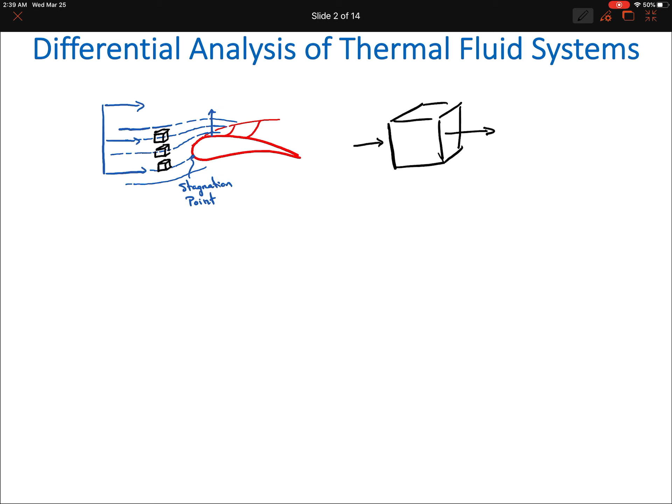And if we consider those boxes, make those boxes larger, well, we have a certain amount of fluid coming in and out, and we could then describe our changes in mass, our changes in momentum, and from that we could provide an estimate for what happens with the airplane wing. So this differential control volume is the key to this whole analytical process.

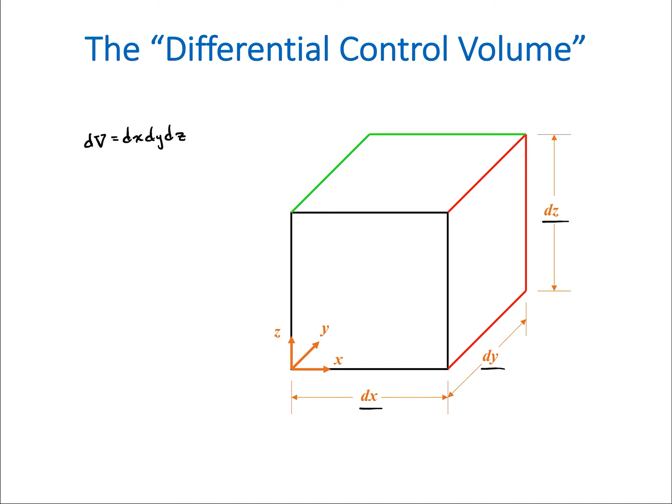And we define it by dx, dy, and dz. So our differential volume is defined as dx, dy, dz. We could also say that the amount of mass inside of this differential volume, our differential mass, would be equivalent to our density times our differential volume.

Now if our volume, if this dV is quite small, we might be able to say that rho is constant. We could say this if dV is very, very small, or if we have an incompressible fluid. This isn't a great way of saying that. Let's say 0.1, it's very small. Not that it's much, much less than 0.1, but just that it's very small.

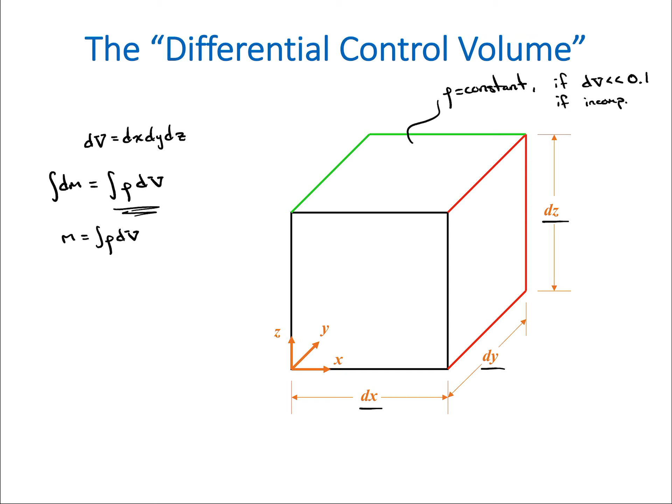So if we do the integral across this entire differential volume, we could then get a statement of the amount of mass that's inside of this system. And we can confirm that that is mass by quick inspection: density is kilograms per meter cubed times meter cubed. We have kilograms. As a result, we clearly have defined what the mass is inside of this volume.

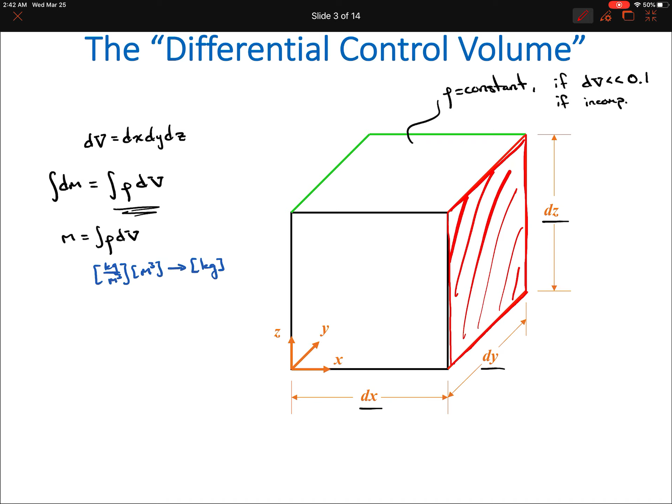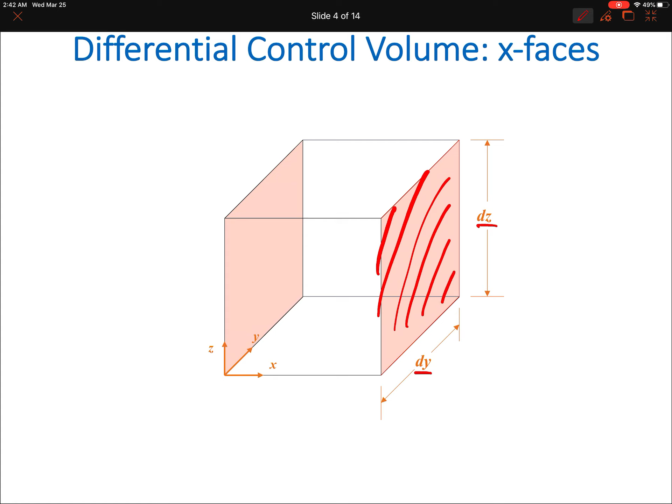Now the thing to pay attention to is the fact that there are all these different faces. There's a dx, there is an x face here on the right hand side, which is defined by dy and dz. So this is that face, dy and dz. It's the x face. We have an x face on the opposite side as well of this same cube.

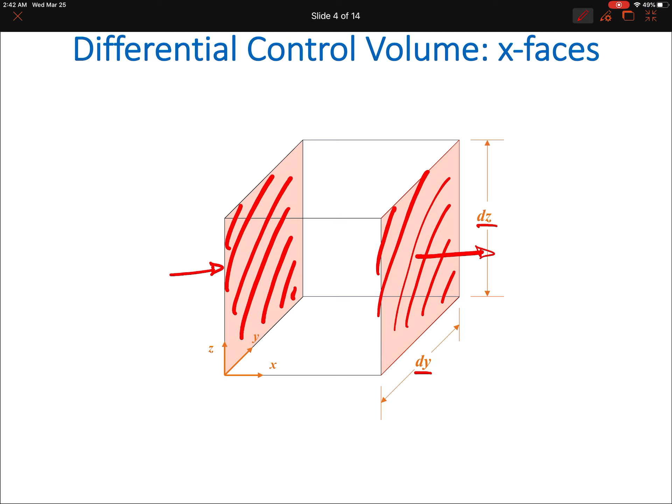This is going to become important because we have a certain amount of flow that comes into the system in the x direction, and a certain amount of flow that goes out in the x direction.

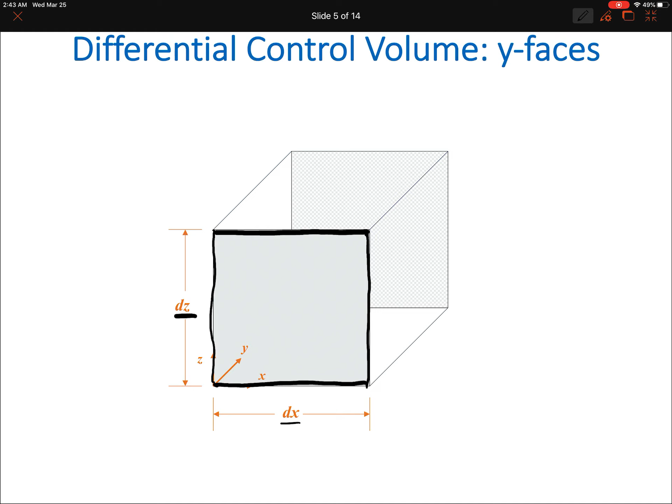The next one is our y face, a constant value for y. And the area of that square is then defined as dz dx. And then we have a similar thing on the opposite side, but further in the y direction.

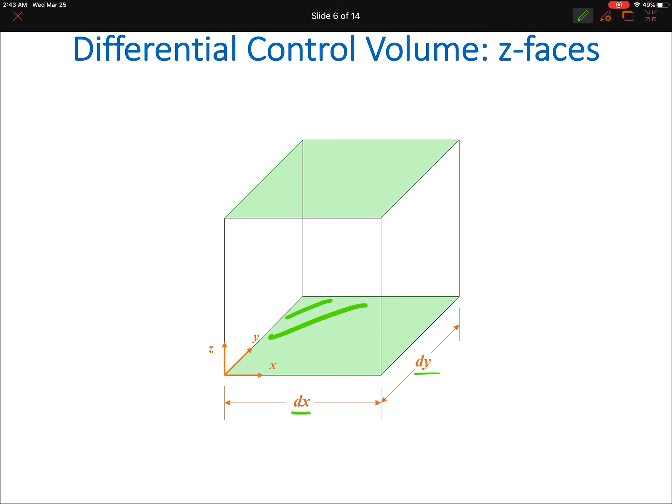And then last, we have our constant z faces, or planar, in the z direction. This is defined as dx dy in terms of the area. So the area of a z face is always defined as dx dy.

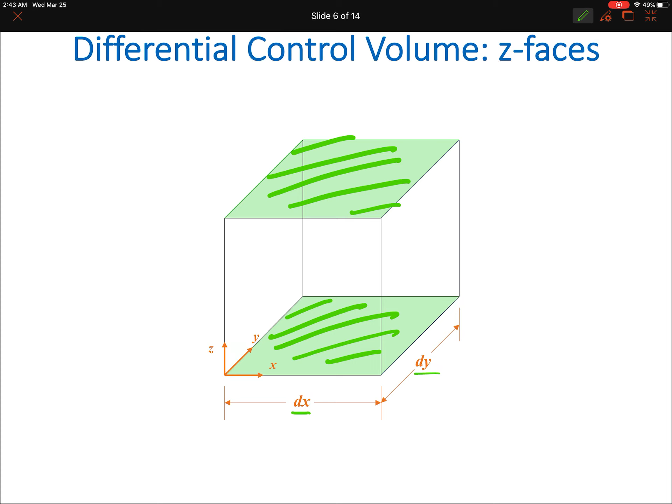Now, our conservation of mass, we've talked about this a number of times in previous classes, is defined as the rate of change of mass stored within the control volume, or mass accumulated within the control volume.

One easy analogy to think about this is say you had a tank that had a spout with water coming out of it, and you also had a faucet that was simultaneously filling the tank. There's a certain amount of water in here. So we have mass m dot in, and we have m dot out, or at the exit.

Well, if m dot in and out are equivalent to one another, then we're not storing anything inside of here, or we're not changing the amount that's being stored. However, if those are not equivalent to one another, then we might be accumulating more water inside of that tank. And that's what this equation is all about: storage. It's basically storage of mass and mass flow in and out of the system.

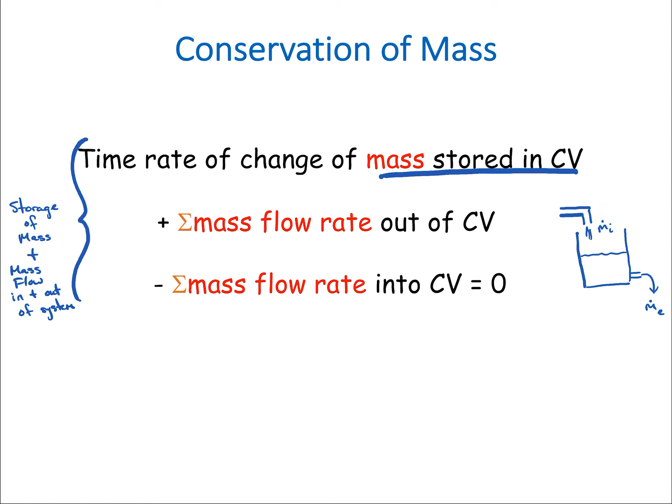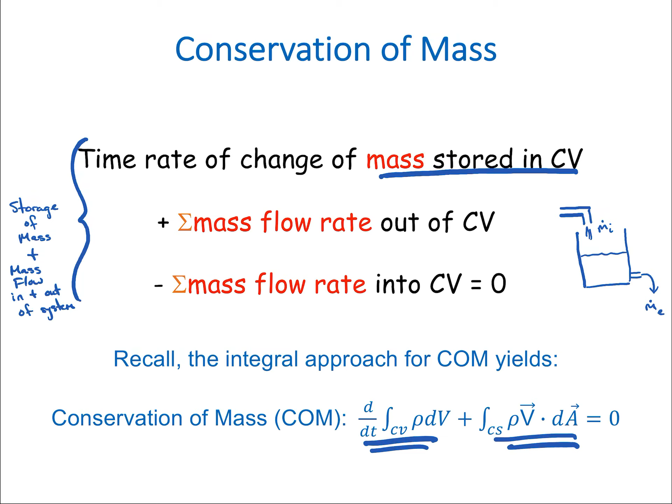Recall that the integral approach we talked about in the last video for conservation of mass yields this equation down here at the bottom. This statement is the rate of change of mass accumulating inside of that control volume, and this statement is the rate at which mass enters and exits the system. Now we're going to derive something that has the potential to give us the same answer, but in this case it's going to be differential analysis, not the integral approach.

So let's think about this differential analysis approach again. What we're showing here, rho dx dy dz, what would that be? We talked about it in a previous slide. Our mass inside of that system would be our density times dx dy dz. So kilograms per meter cubed times meter cubed is going to be equal to kilograms.

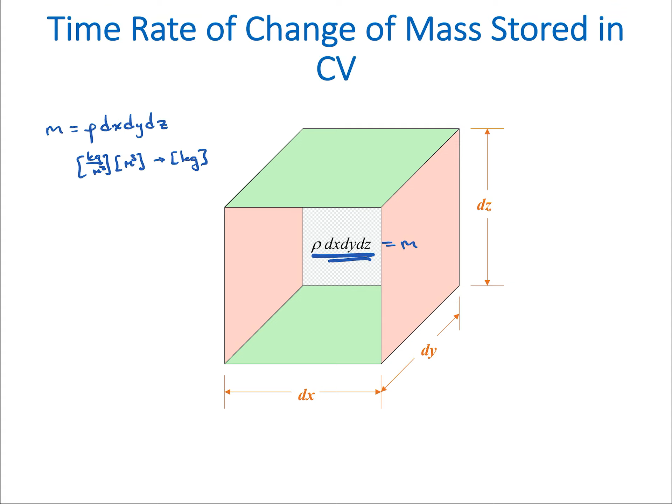So this statement is equal to the mass inside of the control volume, inside of the differential element. Now what we need to recognize is that the rate at which mass is accumulating inside of that system is going to be a function of time. So if we say the partial derivative of density times our volume, we could say partial of time, rho dx dy dz, that would then give us the rate of change of mass inside of the system with respect to time.

So it would give us d/dt within the control volume, the rate of change of mass inside of the control volume with respect to time.

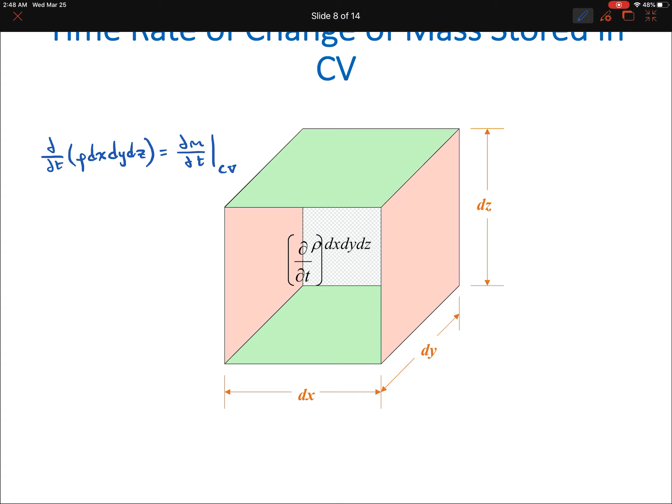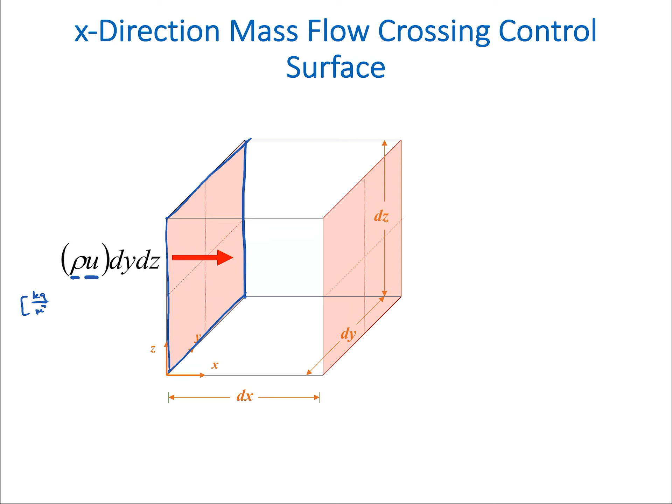Now we could also look at the rate at which mass flows across the control surfaces. On the far left-hand side, let's imagine that we have a certain density and an x velocity u, and then we're going to multiply that by the area over which that fluid is flowing in. By inspection, we have kilograms per meter cubed, meters per second, and then meters and meters. We end up with kilograms per second.

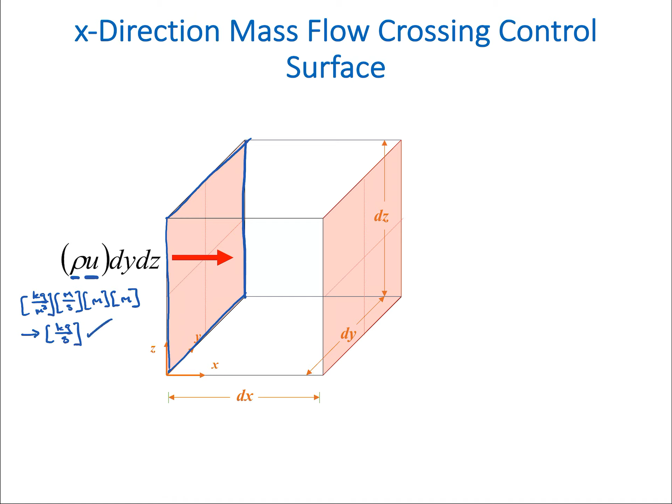That makes sense, dm/dt, a rate of mass flow into the system. Now the thing that gets tricky the first time you're seeing these differential elements is that if you imagine you are here on the left-hand side, and the velocity in the x direction is equivalent to u, by changing our x location, our velocity might actually change. Imagine we were running fluid through, say, a converging nozzle. The fluid entering here is going to be moving slower than it is by the time it exits the system.

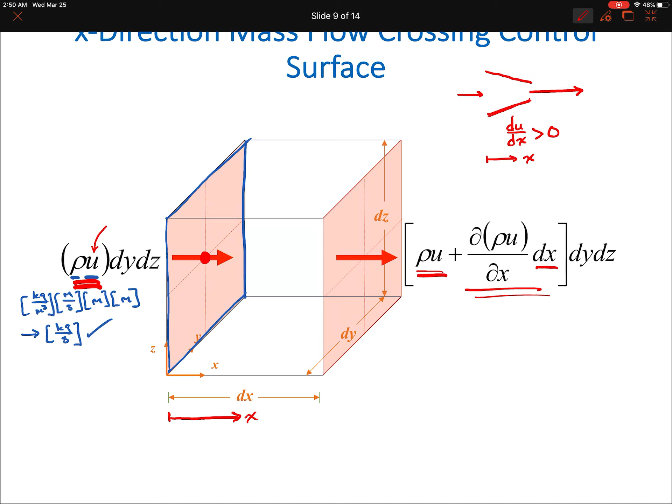As a result, there is a du/dx that is not equal to zero, it increases, in fact it's greater than zero if this is the positive x direction. We could see a similar thing within this control volume, and that's what's being expressed here: in order to understand the amount of mass that comes out on the opposite side, we have the original rho u, but then we have to add in this rate of change of mass flow rate as we get a change in our x direction. So across dx, we have some change that potentially happened in our mass flow rate of fluid.

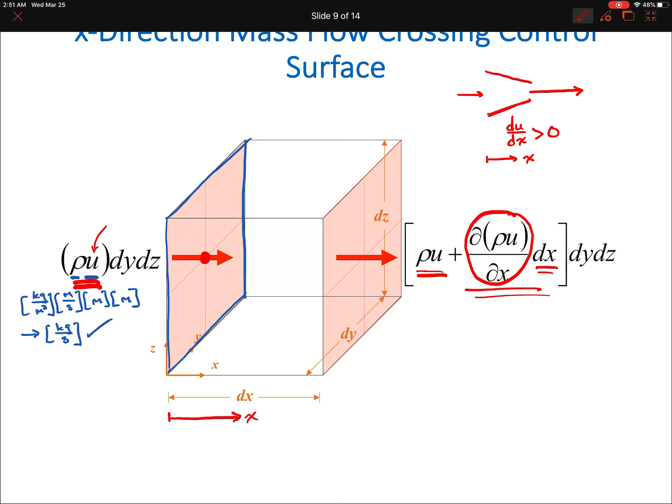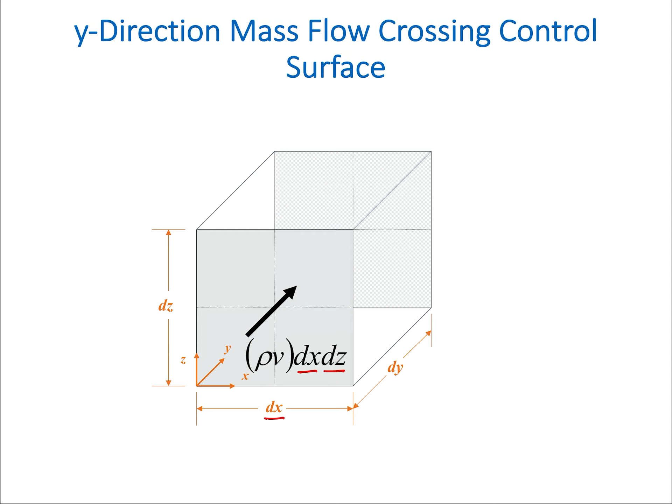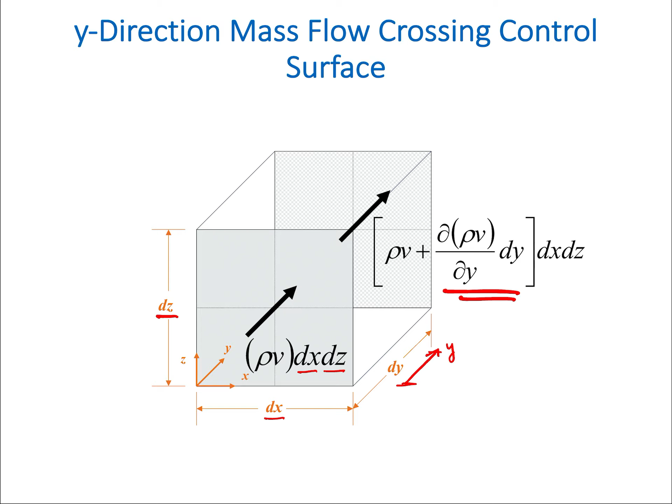We take a similar approach for the other surfaces. In this case, we have our y direction. We have rho v, density times our y velocity, and in this case we're doing dx dz, because that's the planar surface we're moving into. And then on the opposite side, we have to account for the potential change as a result of moving in the y direction, and then again we multiply by dx dz.

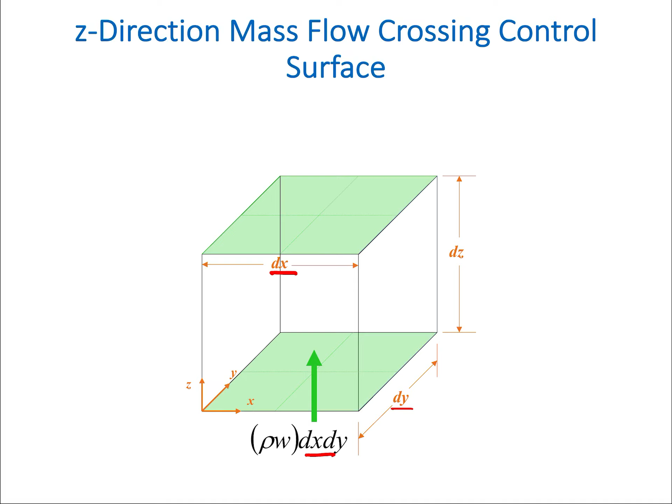And last, we have the z surface. We are left with a certain amount of flow that comes into the bottom of the system, and we multiply that by dx dy, which is the amount of area of that surface. Then on the opposing side, we've adjusted for our potential gradient in velocity in the z direction, so a potential change in the z direction.

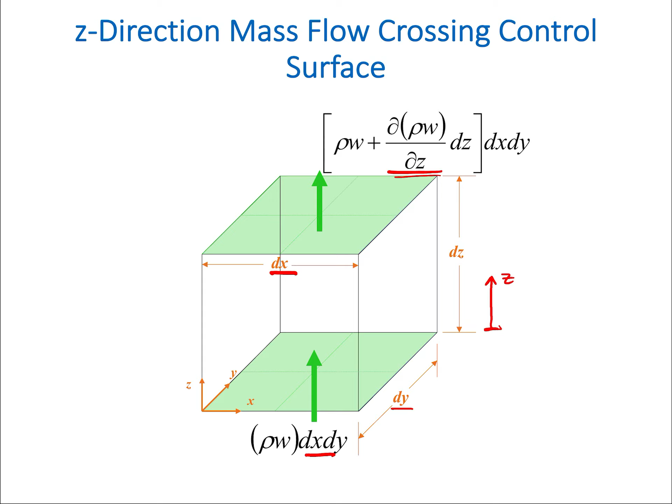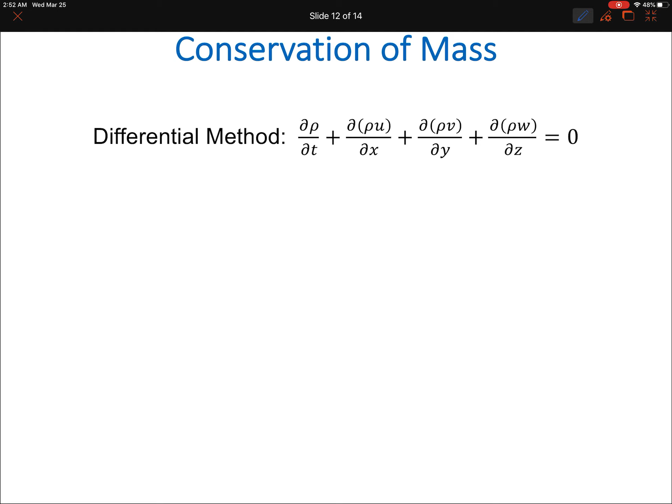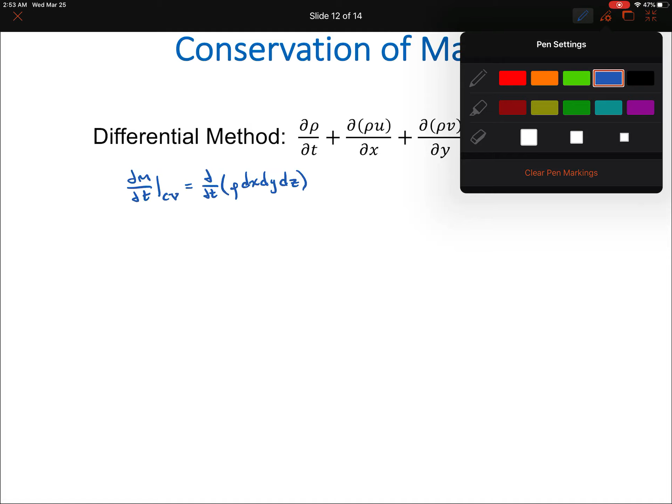dx, dy, dz. Now if you go back to those slides and consider what they all mean, and if you look at equation 17.2, so review equation 17.2 in the text and 17.3, you will see that the dx, dy, dz gets canceled in each term. Each term we cancel the dx, dy, and dz. They get divided out with the 0 on the opposite side.

And as a result, what we're left with is this: d rho dt, the change in density with respect to time. Now that's not intuitive when people first see it, because they're not expecting us to express the change of density with respect to time. Your intuition would lean you more towards change of mass with respect to time. You've got to realize that d rho dt, the change in density with respect to time, is actually representing change in mass with respect to time.

And then we have our convective terms, the rate at which mass gets transferred across the surface. Let me be more explicit: these three terms represent the net mass flow rate exiting the control volume. This is convective flow of mass flow rate across the surfaces of the control volume. And then this term here, d rho dt, is the rate of change of mass stored in the control volume, say, accumulated inside of the control volume.

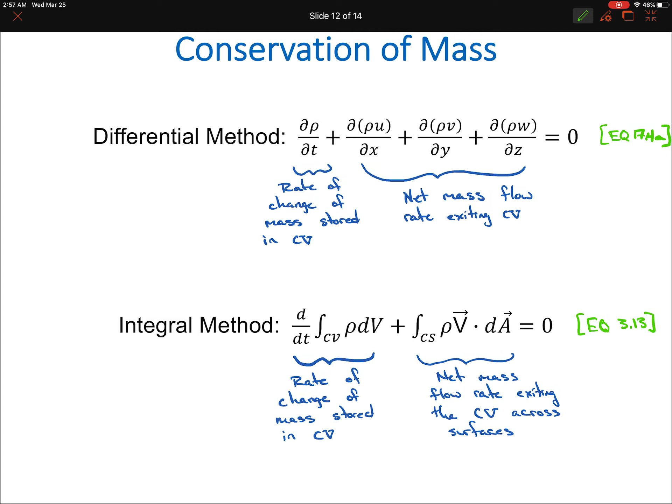So a couple things here real quick just to make sure it's clear. This is equation 3.13 if you want to track it down, it's also at the beginning of chapter 17. And then we have this, which is equation 17.4a.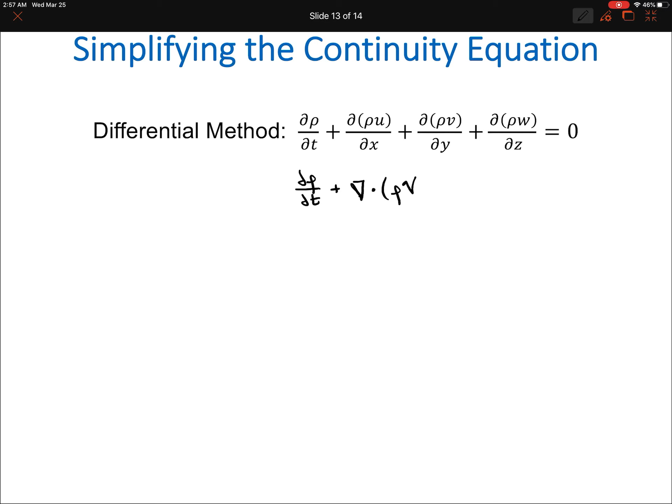So if we were to define this equation as being steady flow, we could simplify down to an expression that would look like this, equal to 0. If we then said we had an incompressible flow, we could simplify further, because now our density would not be a function of x, y, or z. So rho is a constant, therefore density is not a function of x, y, or z. So we could get a statement that the partial of u with respect to x, partial of v with respect to y, and partial of w with respect to z are all equal to 0.